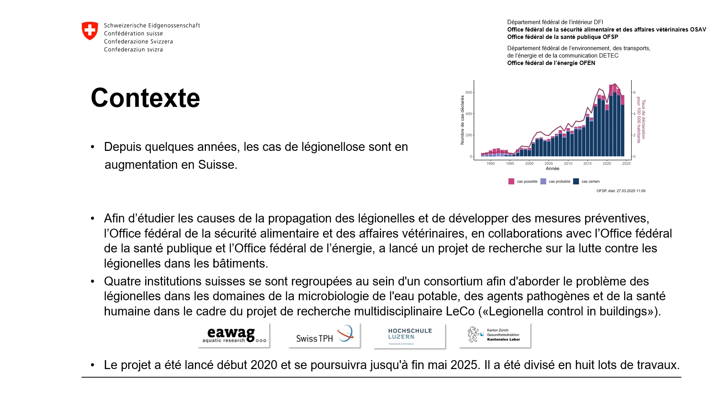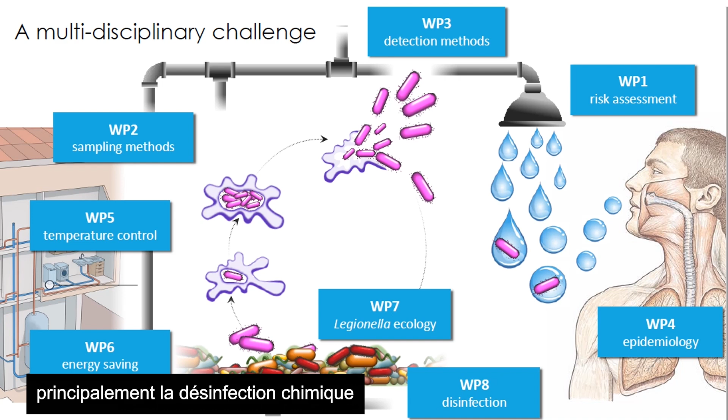Hello everyone, my name is Antonia Eichelberg and I'm a researcher at EAWAG, and today I will talk in this video about chemical disinfection against Legionella in building plumbing systems. This work was part of work package 8 of the LeCo project, which was about disinfection, mainly chemical disinfection against Legionella.

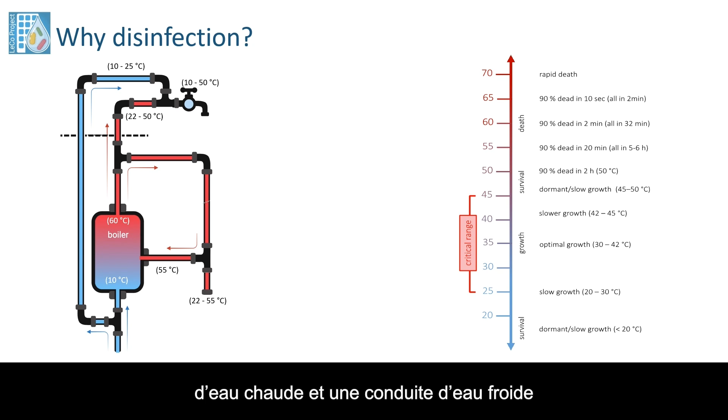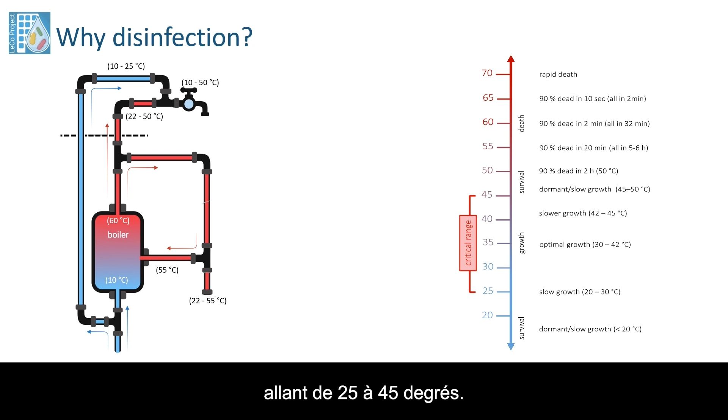Why do we even talk about disinfection? For this, we need to have a bit of a closer look in a building plumbing system. Here on the left side, you see a very simplified image of such a system. And as you can see, there is a hot water line and a cold water line with very different temperatures. This is important to know that Legionella only grows in a certain range, so in this critical range, meaning from 25 to 45 degrees. And it is important to keep water temperatures outside of this critical range so that Legionella cannot even start to grow.

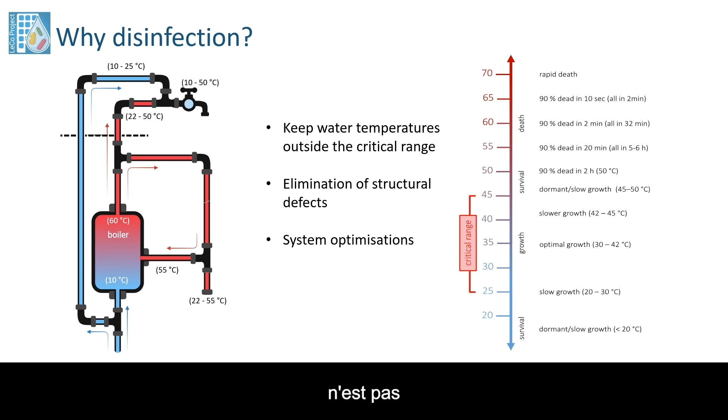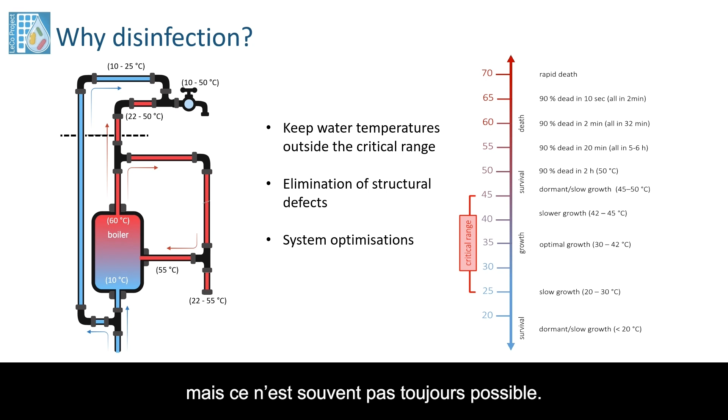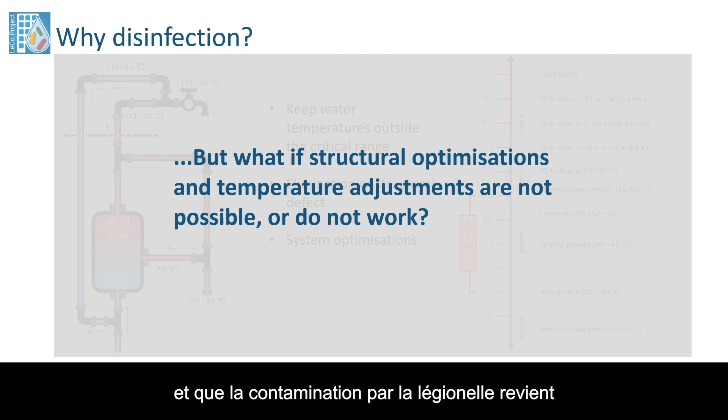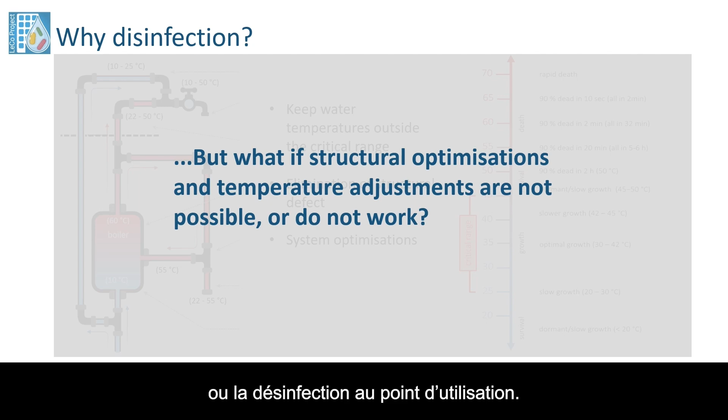But this is not always possible, as already presented in other videos of this series. There are structural defects or system defects that can be tried to eliminate, but often not always possible. So what do we do if the structural optimizations and temperature adjustments are not possible or just do not work and Legionella contamination comes over and over again? So for this, disinfection is often chosen. There are many different types of disinfection, for example, thermal disinfection or point of use disinfection. In this presentation, I will talk about chemical disinfection methods and how they are embedded in the Swiss legal framework.

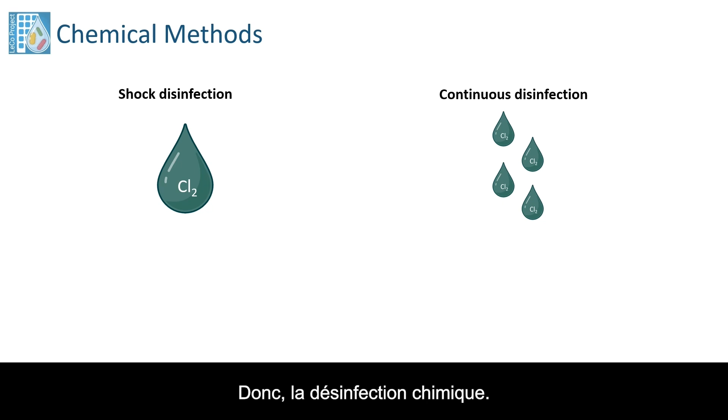So, chemical disinfection methods. There is mainly shock disinfection and continuous disinfection. The first one is a short-term one-time disinfection with a very high concentration, and the other one is a long-term disinfection with low concentration. Because of these differences, they are also used for different purposes. So one is used for remediation and the other one for prevention. So let's have a deeper look at them.

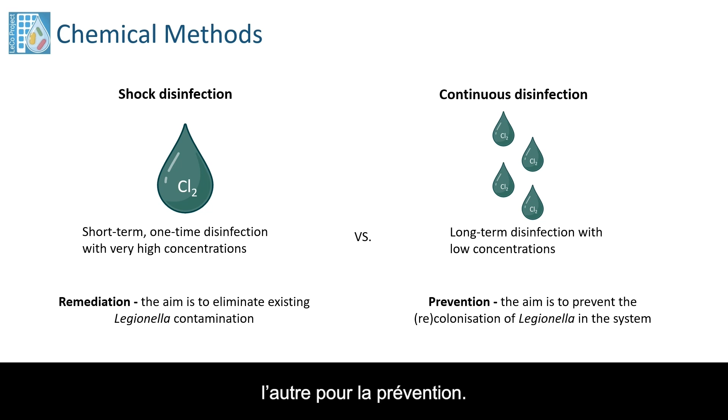Shock disinfection is a chemical disinfection that is mainly used for remediation. So the aim is to eliminate existing Legionella contamination. So there is a contaminated building and system optimizations or remediation have been tried or have been performed, but the Legionella is still in the biofilm and in the system. So there is a high concentration of chemicals applied to eliminate those.

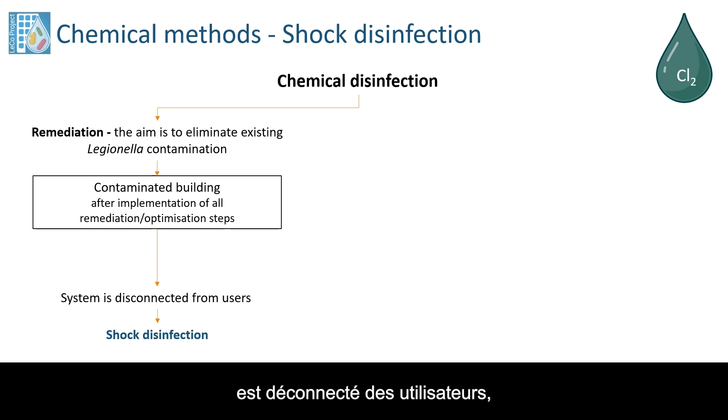Important to know is that the system is disconnected from the user. Typically high concentrations of chlorine, chlorine dioxide, or hydrogen peroxide are applied, and as it is disconnected from the user, there is no direct regulation on this. However, there are guidelines how to apply this. Important for this shock disinfection method is that the optimal concentration and reaction times are chosen and material compatibility is checked. So every building plumbing system is built up with different materials, and these chemicals do not only react with the biofilm or with the Legionella in the system, but with the whole system, so also with the tubing. So it's important to assess this.

Also, it is important to keep in mind that not only the compounds that you use have any health risk or environmental impact, but also their byproducts. So it's important to measure for the compounds, but also for the byproducts, and in the end, to properly dispose them. Very important is that building plumbing systems are very complex systems, and often not all sections are reached. But Legionella can grow in very distal parts of the system, and so it needs to be made sure that with the disinfection or with these chemicals, every single tap is reached.

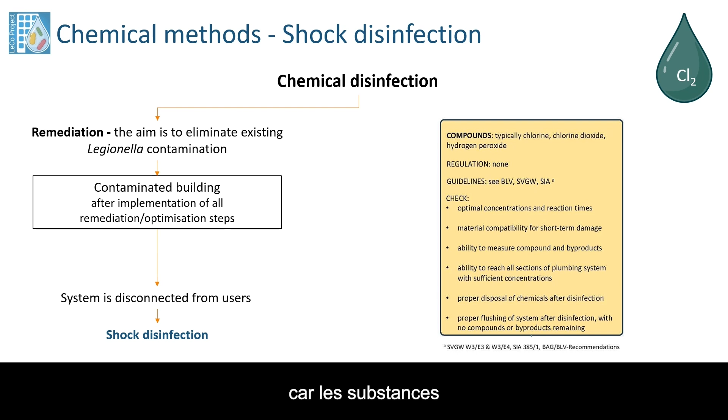And the last point to keep in mind for this method is that after the disinfection method was applied, there's a proper flushing of the system, because the compounds and byproducts can remain and should be flushed out before it is reconnected to a user. So let's look at continuous disinfection.

This is a chemical disinfection that is often used for prevention. So the aim is to prevent the colonization and or recolonization of Legionella in the system. This is, for example, used in already remediated buildings that already performed system optimizations, maybe also a shock disinfection, but the Legionella contamination comes back, or they just want to be sure that it does not come back. Also, for example, in buildings with occupants at high risk, for example, hospitals or retirement homes, or in energy-saving buildings.

So this is a highly discussed topic, but in these energy-saving buildings, the aim is to save energy, and one part is by reducing or lowering the water temperature of the system, but this can then drop in the Legionella critical range. So to be sure that there is no Legionella growing in the system, another strategy needs to be applied, and often continuous disinfection is chosen. Important here to know is that the system is not disconnected from the user, it is a long-term application and the users are exposed to these chemicals.

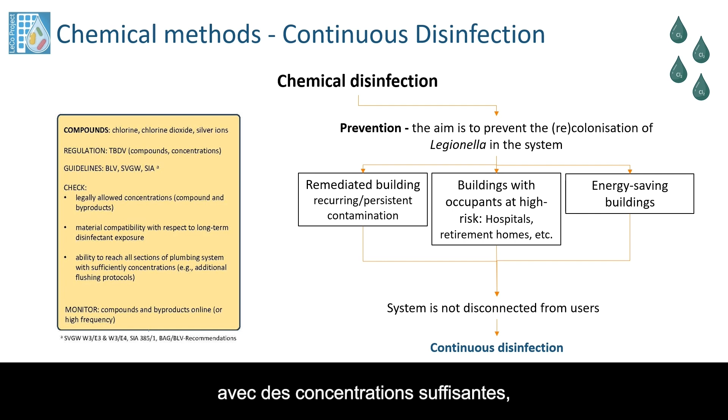This continuous disinfection is regulated by the TBDV, and the compounds that are used are chlorine, chlorine dioxide and silver ion, and also there are guidelines that describe how to apply. Important is to check the material compatibility because it is a long-term disinfection and these chemicals can cause aging of the system. And also, as before, it is important that it reaches all sections of the building plumbing system at sufficient concentrations so that the whole system is being disinfected.

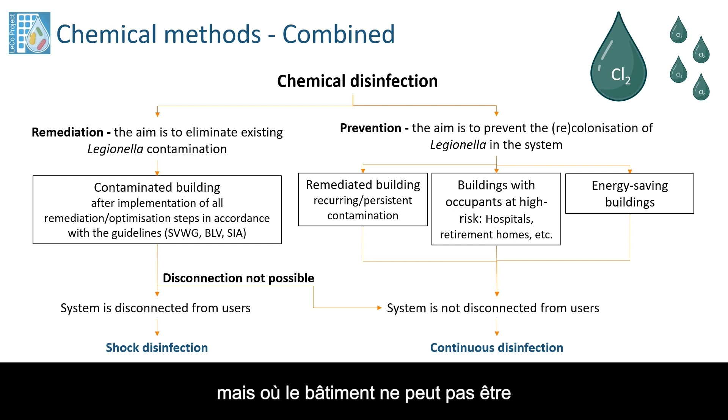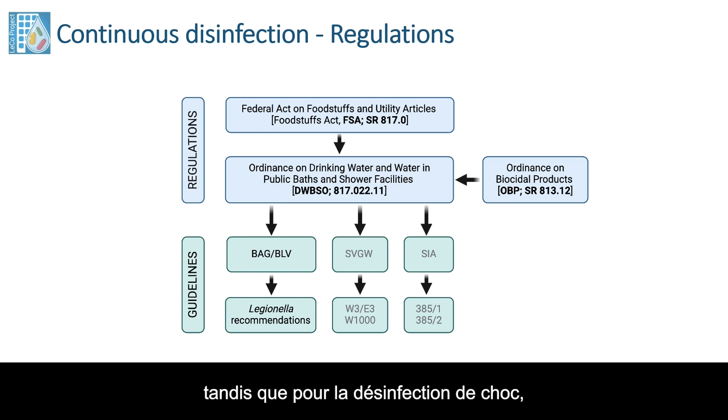Here we have the comparison of the two, so the remediation, meaning shock disinfection, and prevention, continuous disinfection. Of course, this is a very simplified description of the two, and there are also different situations. The aim is remediation, but the building cannot be disconnected from the user. So there is a continuous disinfection performed. So as mentioned before, for the continuous disinfection, there are regulations. And for the shock disinfections, there are no regulations, but for both, there are guidelines how to apply them.

However, it does not say that the effective concentrations found in the literature are one-to-one applicable. It should be known that these studies are from all over the world and not all systems work the same way. And so these things cannot be applied one-to-one, but it just clearly shows that those maximum concentrations for continuous disinfection should be checked for their effectiveness. Also, it is important to see the disinfection byproducts. As mentioned several times before, there are harmful byproducts that can be formed, and they can have health hazards and environmental hazards. So this all needs to be seen in a broader context.